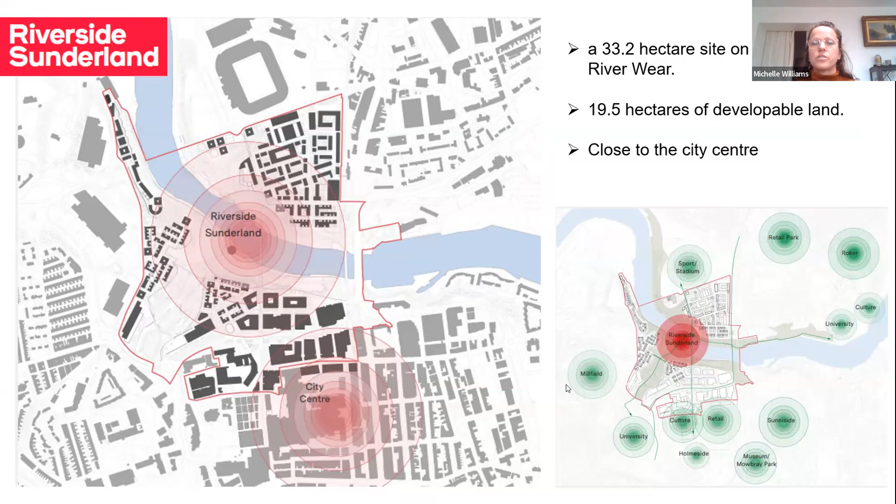Using our footprint methodology, we initially helped the council to focus in on the aspirations for the site and determine the brief. So I'll just go into a bit of what footprint is about.

We established the development methodology called footprint. It helped us set up about 20 years ago what the UN described as the world's first responsible real estate fund. Today we use it across our whole portfolio on behalf of our clients, and we used it here for Riverside Sunderland and on the housing scheme.

These processes are continuously reviewed so that we ensure our clients benefit from our project team's experience. The processes are grouped under 6 dimensions, which are aligned with some of the UN development goals, although the master plan goes on to try and achieve many more, which I'll talk about in a little bit.

So this is our footprint roadmap, and I won't go into too much detail because there's a lot of info, but you can see that we track the evolution of the project through the footprint reviews, which happen at each key gateway. We score the project at each stage against the market standard and then how it is doing against the initial brief.

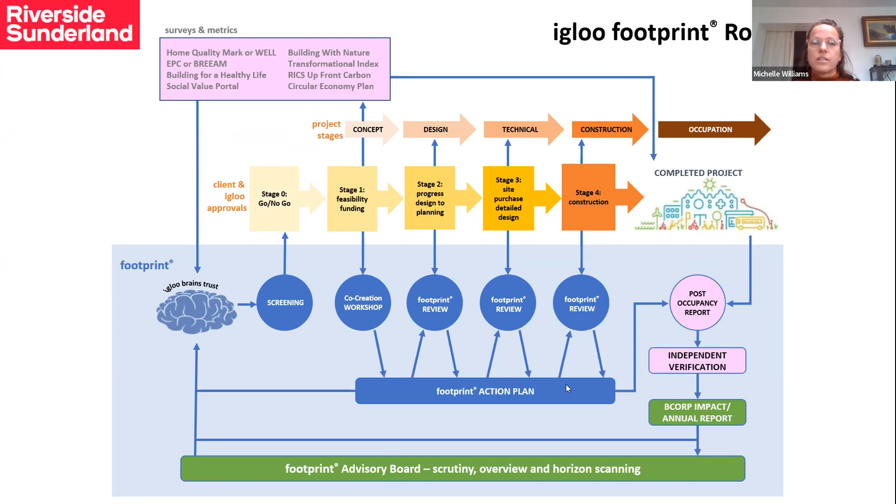The methodology is audited by JLL, and we have a footprint board called FAB, which is made up of industry expert advisors. But now back to Sunderland.

The process starts with a co-creation workshop, where we bring together all the key stakeholders at the beginning of the project to map out what we should be doing to optimize the positive footprint outcome. We then went on to carry out extensive community engagement.

We set up a temporary exhibition in a pop-up shop within the city centre for members of the public to come in, and more than 400 people did come to meet our team and share their ideas.

That was followed by a 4-day workshop with 135 people, who took part in an intensive programme of site visits and discussions. An example of one of the events we held: we worked with a community group and took members of the public to explore Galleys Gill Park, which you'll learn about in a bit, where they engaged in nature spotting and picking blackberries.

All that engagement is then fed into the project action plan, which is essentially the brief, and that records the priorities and actions with a maximum positive impact.

Riverside Sunderland is a beacon of change, leading the way towards a new kind of city living for the future. Harmoniously integrated in this green and waterside landscape, Riverside Sunderland is a magnet for investment, attracting businesses and homemakers seeking to pioneer a planet-conscious and prosperous future and find a sense of belonging in a new, forward-thinking, zero-carbon community.

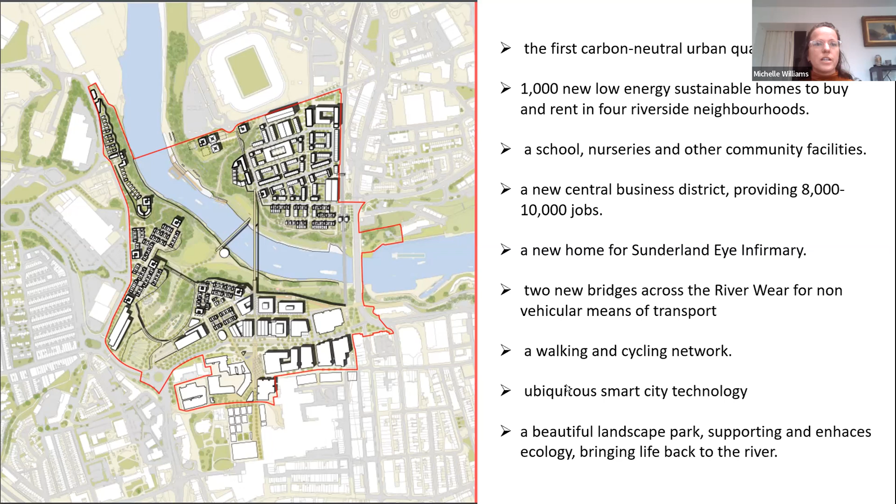At the end of the presentation, we can share website links to our methodology and the master plan details as well, if you want to take a closer look.

I have stopped sharing. Paul, over to you. Right, hopefully I'm sharing - is that sharing screen now? Just my face. Paul, we agreed we weren't going to do this. Please don't start showing mine now. Is that sharing? I think you've got something above what you want to be sharing - your Google Maps tab, I think, on top of the presentation beneath. Is the green plan showing now? Yeah, there is. Yay, perfect.

Apologies, everybody. Hello, I'm Paul Shirley Smith, a director at Camlins. We're landscape architects with a team of 15 to 20 people in Shrewsbury. We work all over the UK, sometimes beyond, and we've been at this for more than 30 years. We're broadly a design-led urban regeneration practice, among other things.

So this is an amazing project for us - it's a huge project. It addresses all the big things that preoccupy most of us these days: climate emergency, biodiversity crisis, levelling up, basically finding new ways of living, and immediate local concerns like creating jobs and building communal life in the city. There's a huge appetite for this in Sunderland to get on with that right now, and that's really what this plan is about.

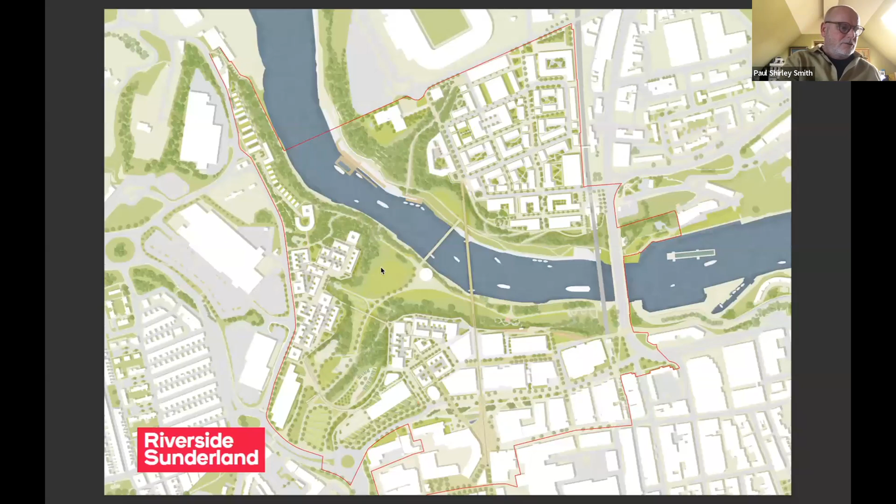I'm going to talk about the master plan, and my colleague Luke Coe is going to talk about Vaux Housing, which is a part of the master plan about to be delivered. There's so much to say and not much time, so I'll go quite quickly, but even then it's still only a snapshot of all the work that's gone on.

So this is an aerial 3D of our big green plan. We can see the North Sea out here, the River Wear and the River Gorge, and the city. This is the Victorian grid, the city centre itself coming across, and then we can see the site with the new neighbourhoods here, here and here, all based around the gorge and this huge amount of greenery.

I'm actually going to, hopefully this will work now - sharing my screen with Google Earth. Much of this work was done during lockdown, and we found it was so hard to understand the 3D that half of our meetings were spent zooming around in Google Earth. So I'm going to do that now because it's the quickest way to explain a whole lot of things.

This is Sunderland - you can see the whole size of it here, and you can see that this site, although it's very green, is actually a city centre site. This is the city centre, and this is the site here, right here. So it's a city centre site - very important to keep that in mind. But it's a city centre site with a difference; it doesn't feel like the city centre. Out of all the places I've worked over the last 30 years or so, this is actually the most dramatic and interesting place in terms of its topography and its history.

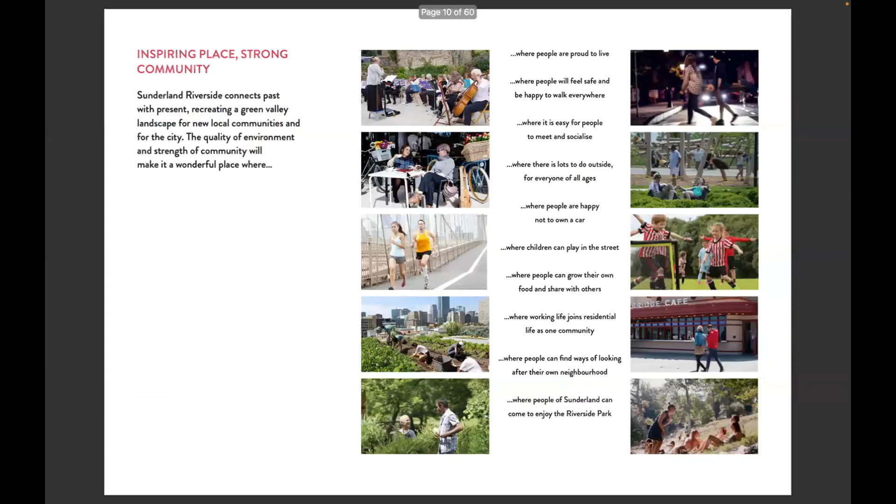So this is all about people and their aspirations. It's not a drawing exercise or interesting geometry exercise, it's about people. Here in Sunderland, it's got to be about history, obviously, but mostly it's about change and about the future, and it's about their relationship with their environment. The master plan basically sets up relationships between people and the natural world in a way which helps things to flourish.

So you've seen the general arrangement of what's here now. This is the existing site, so we can see Vaux here, the brownfield sites that Michelle mentioned, Farringdon Row, and this huge Sheepfolds area with the gorge coming through there.

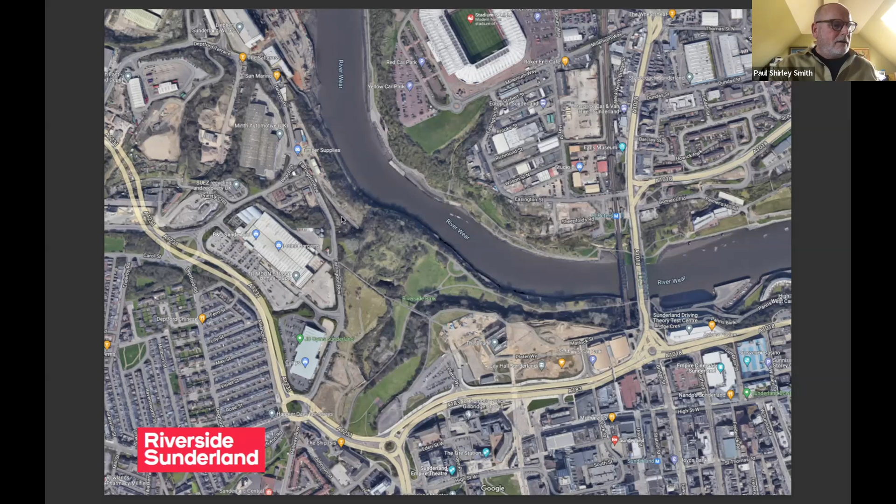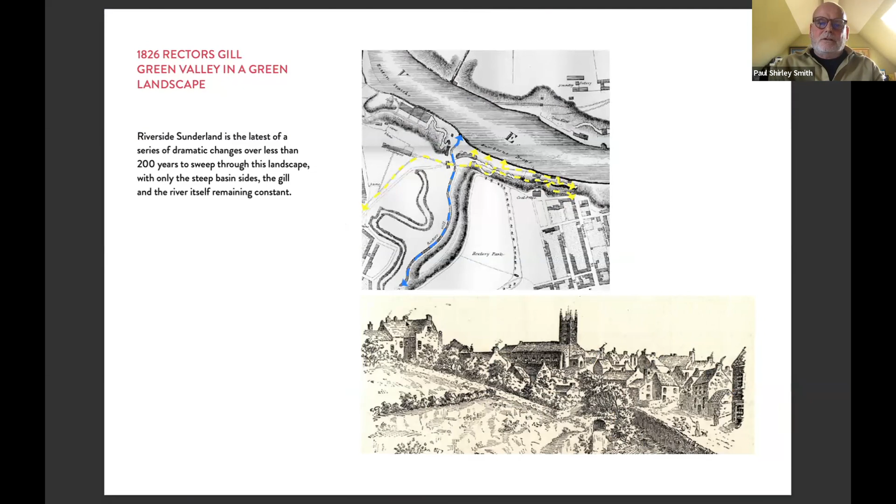So just very briefly at the history, even by 1826 we can see the industrial revolution was already getting going. This was still a completely green little valley coming down to the gorge, but by the 1940s the whole thing was completely subsumed in the industrialization of Wearside. There's shipbuilding on an astonishing scale, of global importance really. But actually this is all about the collieries on this site, and this is where all the coal drops came through from various tunnels and collieries to drop down onto boats.

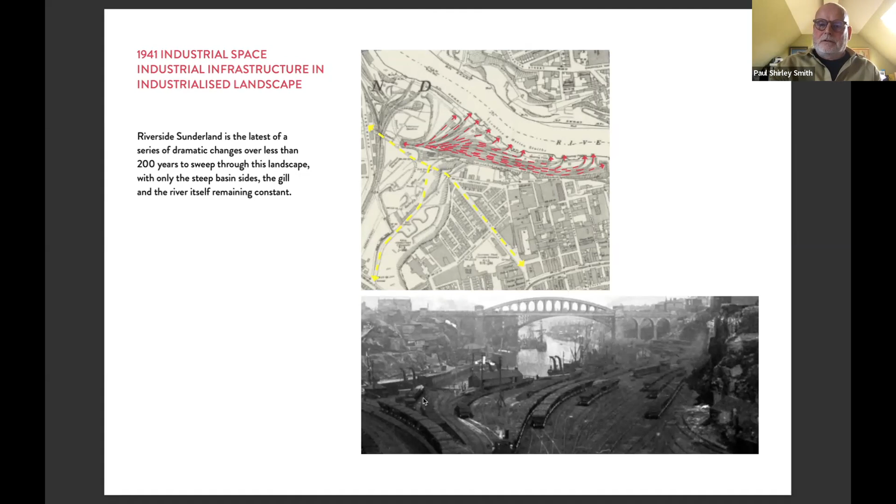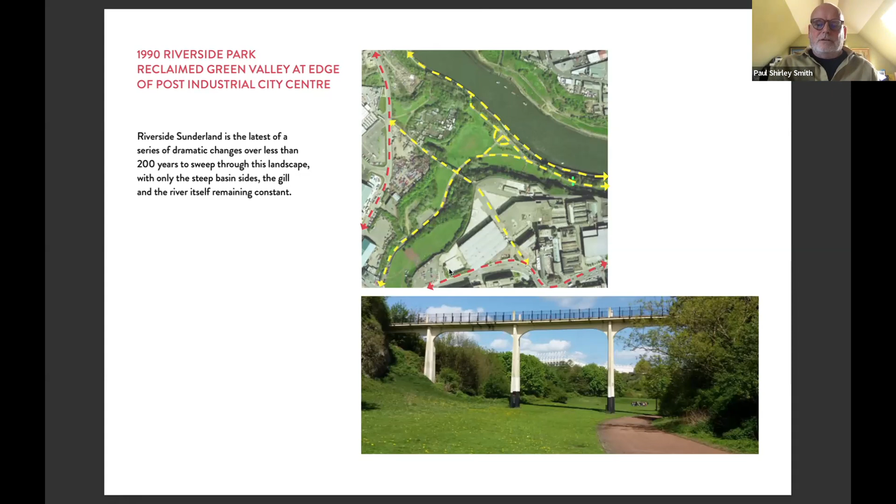So completely industrialized. Then by the time we get through to the 90s, there's a reclamation process which greened and cleaned everything up. There's lots of great work there, very important first steps, but it wasn't part of an overall vision for joining communities together. So the net result is it still feels very, very cut off and remote, and that's how we find it today. So the current plan is to actually make it the centre of a much bigger master plan, and then finally bring it back.

Topography is a huge issue. So we have the city up above, there's a big series of plateaus, and then cutting through that we've got these steep banks—we say banks here, but actually they're literally cliffs—coming down to the park level in the middle, and then a further drop down to the actual River Wear itself.

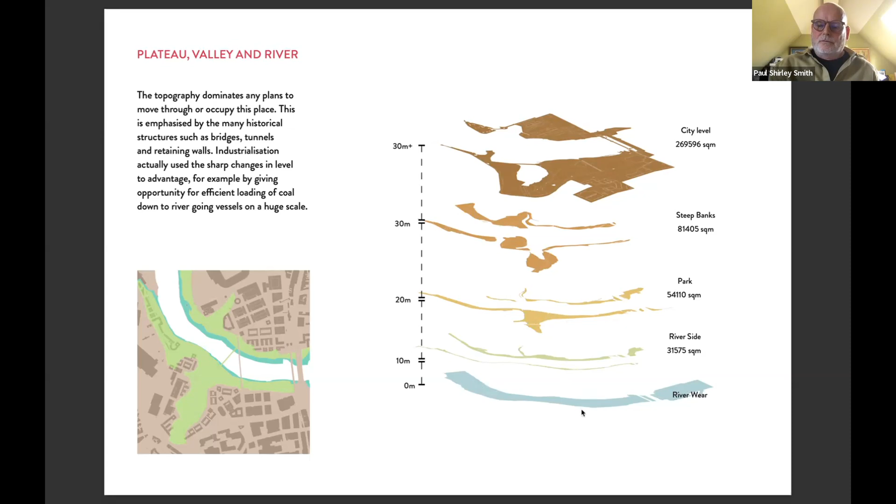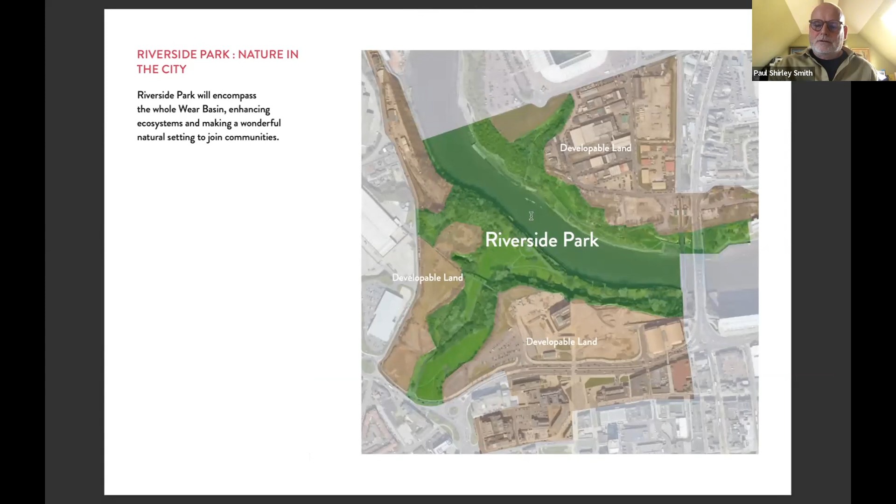So that gives us this pattern of developable land, flat land which is well connected with the city, and then this whole world of greenery in and around the River Gorge, connecting up in various ways. And then this shows how that gives rise to this series of new communities and development land.

We thought it was really important to start by talking about biodiversity, and the heart of the site is already very biodiverse, not least the river itself and its ecology. We worked very closely with ecologists to categorize and quantify all of the existing habitat, a rigorous process which we then took into the proposals—this is the master plan where we've categorized and quantified all of the proposed landscape.

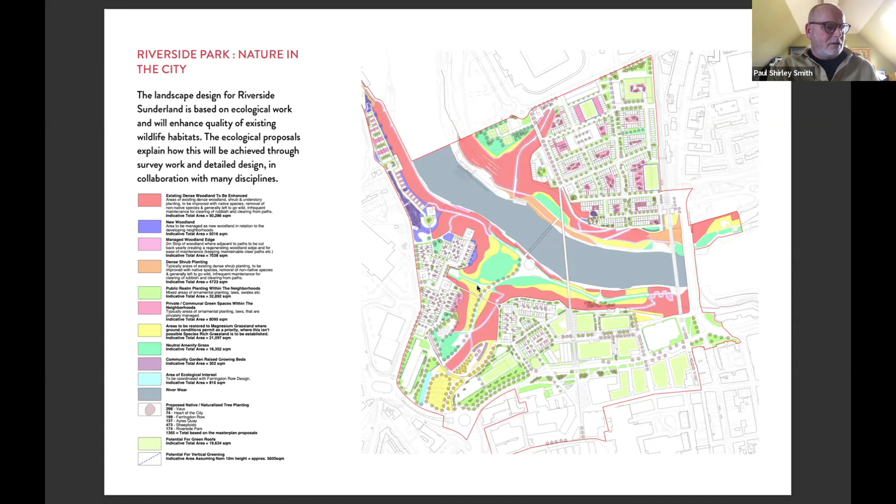So we're thinking of landscape not as landscaping, we're thinking of it as habitat, and what this has given us is a net gain of 11.2% at this level. Obviously that needs to be taken into the detail, but there's a target there for everybody to meet within each different development. It does make sense at a big scale and can be carried through to a small scale.

We've talked about movement and the fact that this existing movement is essentially very weak and poor quality in terms of what the routes are actually like.

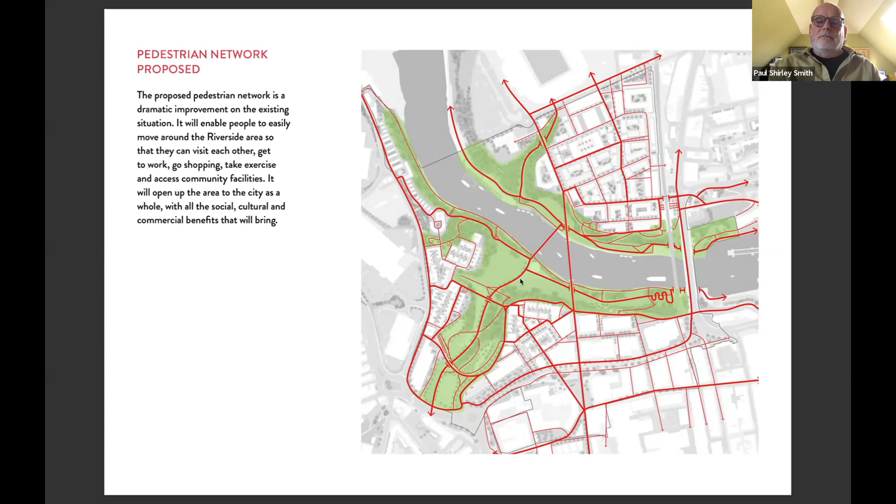The proposed network is much stronger. It's based on a massive increase in connectors, but crucially it's about hierarchy as well. We've determined the accessible routes, which are step-free and properly lit, and concentrated on making all of those work. Then there's a whole finer grain of stepped connectors, which are really important and inevitable and need to be invested in, but secondary to the well-lit, fully connected network.

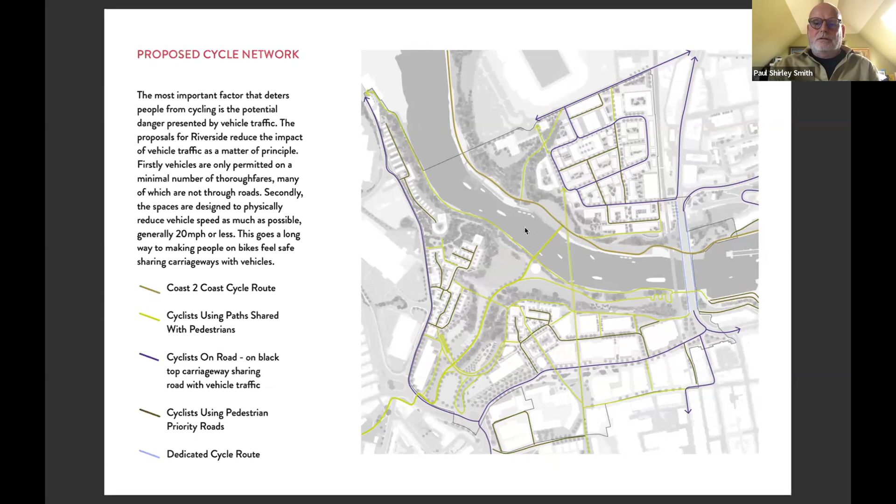The cycle network is based on shared pedestrian space. Imagine this is a fine-grained neighbourhood of green spaces and places where people live, where we wouldn't want segregated superhighways. The only main route, apart from the main roads around, is the coast to coast. But the theme is about how people behave towards each other rather than creating major routes through.

In terms of SUDs, I think like everybody else, we're thinking of this as the sponge city approach. This scheme doesn't have a SUD scheme; it is a SUD scheme. The landscape soaks up water like a sponge and uses it up as much as it attenuates.

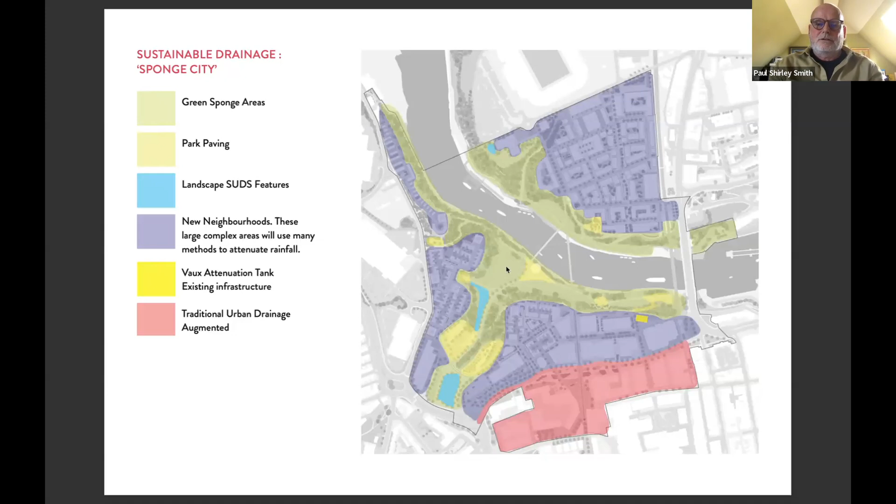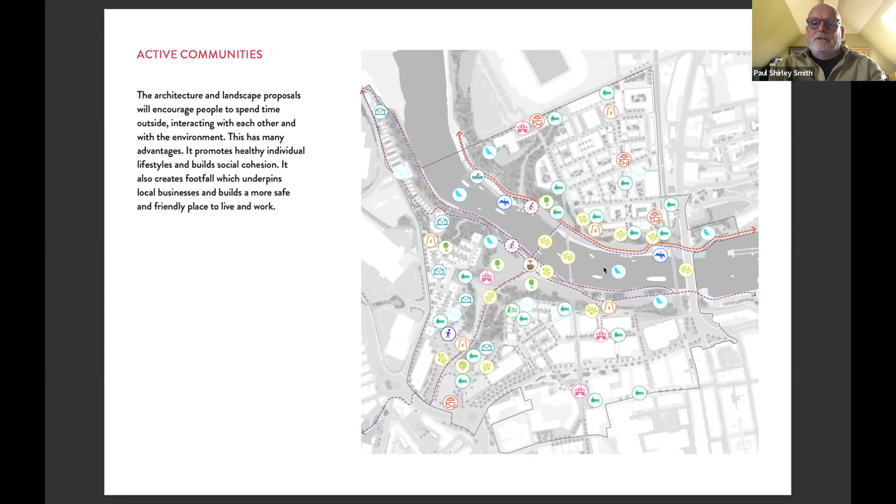Through all of this, we're absolutely intent on the landscape being engaging and adaptable. We're always thinking about what can actually happen here, and that affects not just the landscape design, but how the circulation works, how the road network works, and how all the buildings work, how all the ground floor uses work. All the time, the team's been looking for where are the schools, where's the community centres, where's the surgeries, and so on, and then all the recreational facilities on top of that.

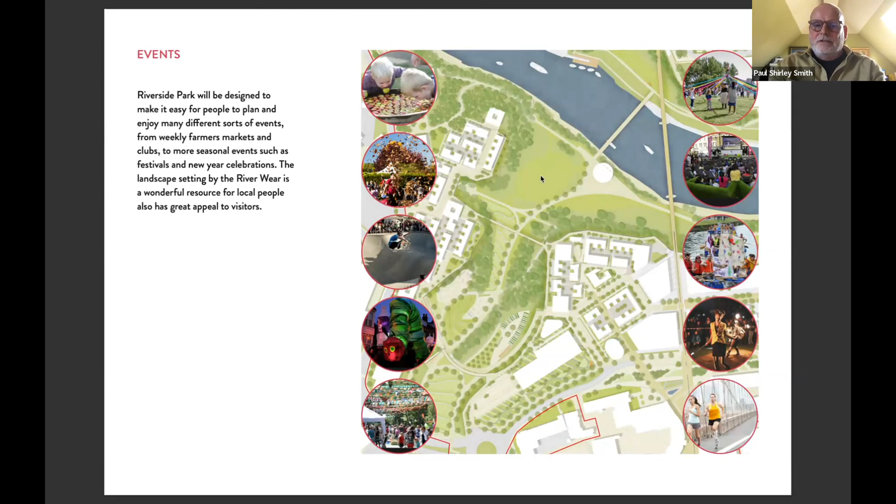The park really is a destination in itself. It's got a lot of multifunctional aspects and lots of facilities, and it works not just on a local scale or a city scale, even a regional scale. It's going to be a very important resource.

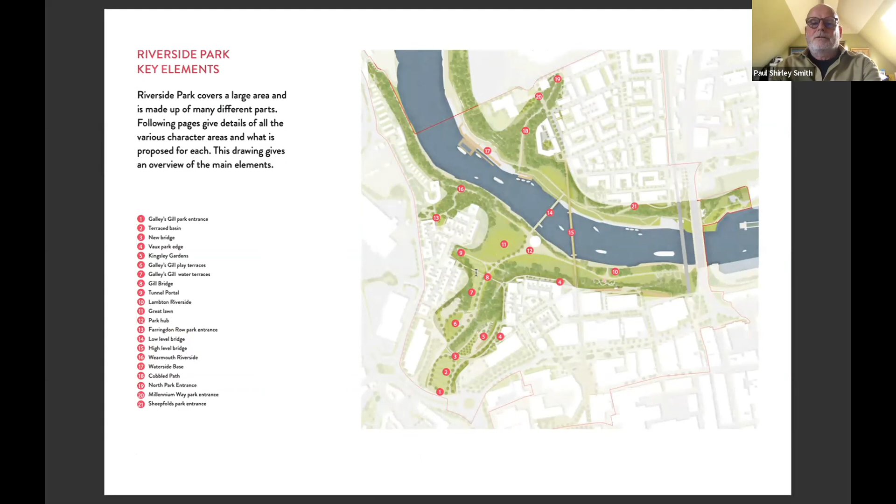We've talked about community well-being, travel, healthy lifestyles, neighbourhoods, and so on. So it's laced through everything we're doing. The park itself is a design set piece, and our friends at One Environments are starting to design parts of it now, particularly some of the SUDS installations.

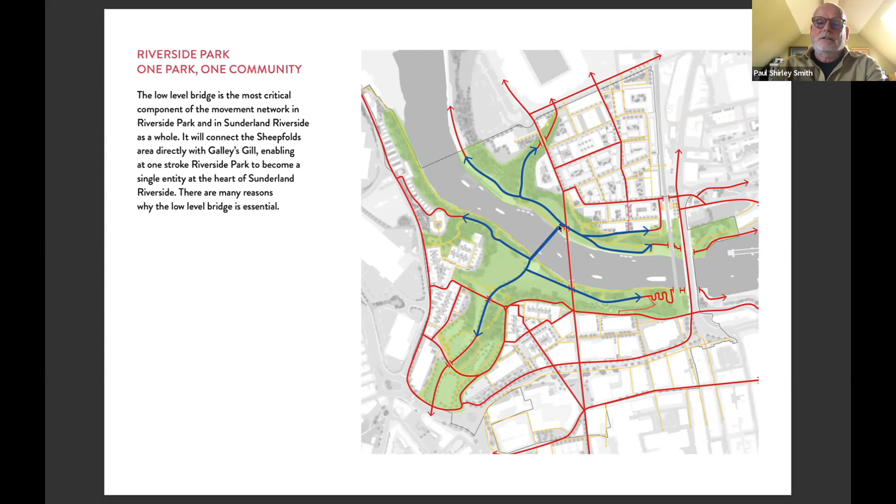I think with the park, the key thing is this, what we call the low-level bridge. It's the key factor in the road and footpath network I talked about. It connects up all of these major routes and pulls the whole thing together down at this park level. There's the higher bridge, the high-level bridge, which sort of literally overlooks it - it just sails over the top through the sky, looking down on all of this. So it's not connected with this network. It's the low-level bridge which is the real key thing at this neighbourhood level.

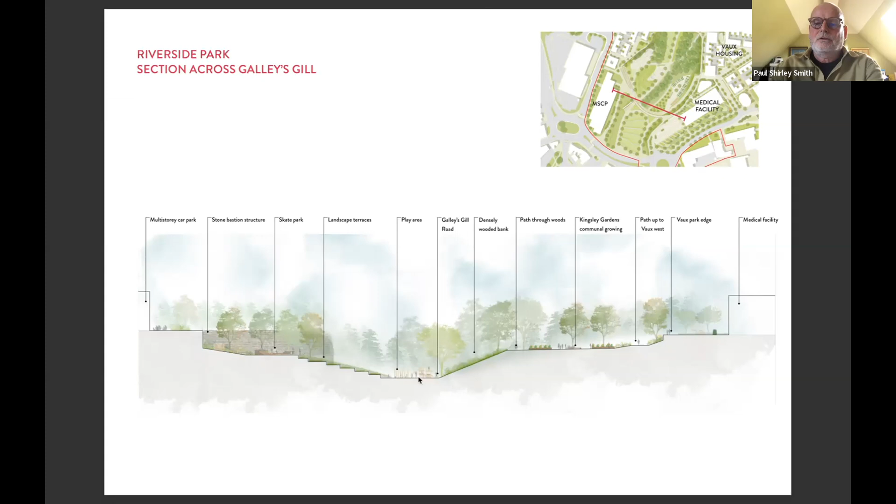This gives you an idea of the scale we're talking about here. So this is just this little bit at the top of Galley's Gill as it starts to slope down from the city. You can already see how separate it is from the city as it slopes down. This is really quite near the top, and here you can see this is the shallowest route down into the area, and that's already nearly 1 in 10 as it slopes down here. So you can see how it's overlooked by all of this new housing up here, which is actually really nice for the housing and really nice for the park - natural surveillance.

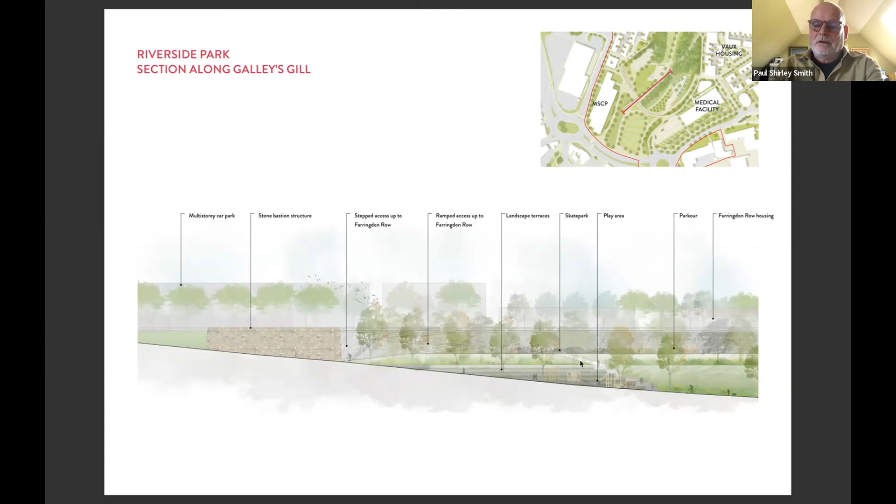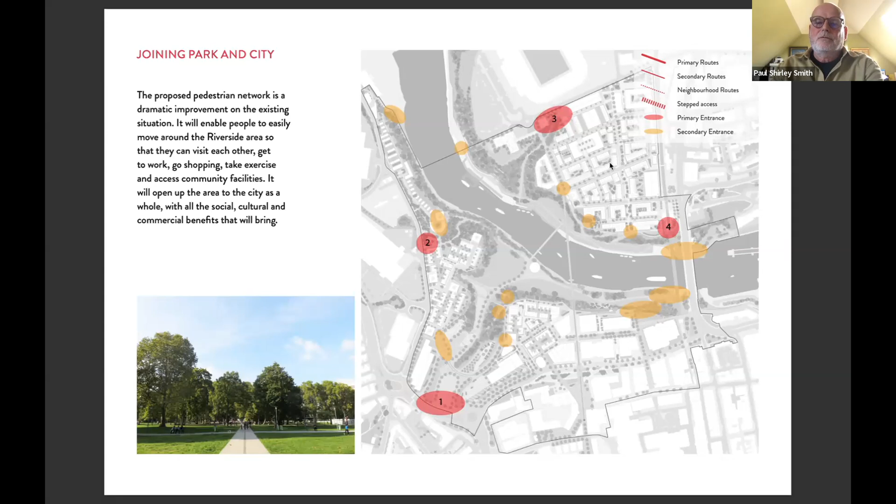The entrances to the park are very important. This is the one I've just mentioned from the south, so there's a real civic presence as Galley's Gill comes up to meet the city here. By the Stadium of Light, we've got a whole new entrance here with a cobbled route coming up, so this needs to have a real civic presence that it doesn't have now. Likewise, there's a metro station here at St Peter's - again, this is an entrance not just into the park, but into the whole of Sheepfolds. And then there's another entrance here at Farringdon Row.

One thing that was impressed upon us very much at the beginning, and became obvious quickly, is that the park at the moment is not a place where most people want to go most of the time, and most people would actually never go there. So that's quite a point to start from.

Lighting is incredibly important in making it not just accessible but inclusive, so that everyone would want to be there. We had to accept that you must light these routes, or else people just will not use it much of the time. And that obviously needs to be balanced with the ecology - really important issues which need to be designed through in the detail.

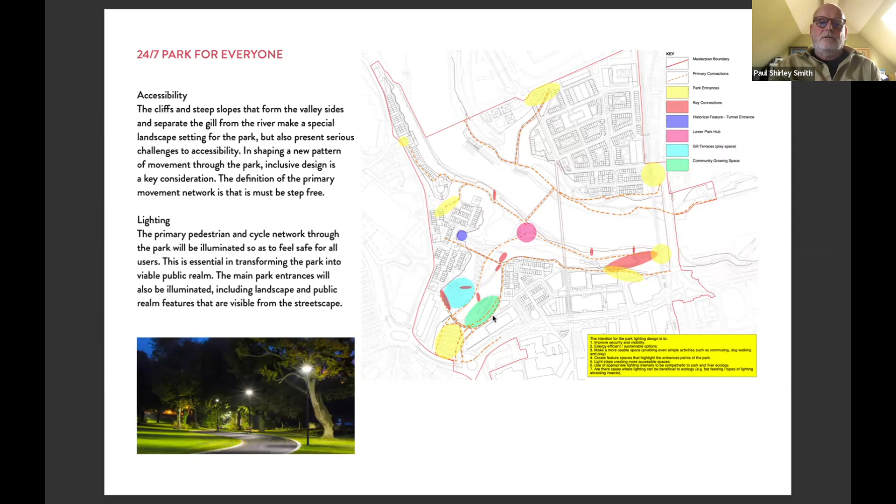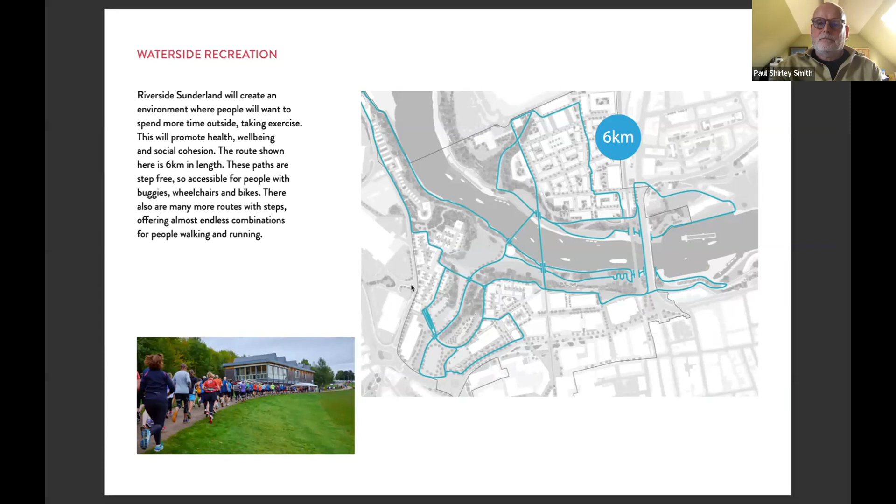We looked at waterside regeneration and recreation. We've got facilities underneath the stadium, but also just how do all these routes go together? This is actually a 6 kilometre running route, or even a pushchair route, or a wheelchair route, step-free route, which we've shown weaving around through the whole area, all focused on the park. This was a very interesting discussion, actually.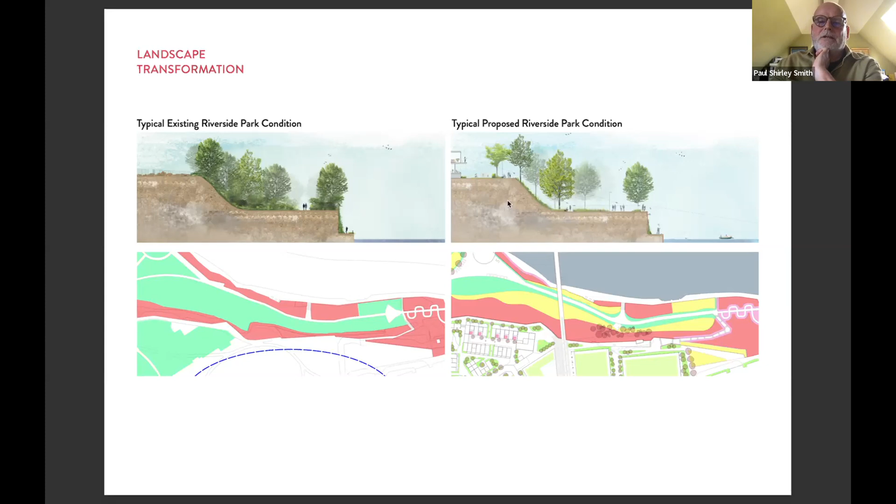And then we've got new uses in the buildings here with visual connectivity right the way back to the edge of the park. But that kind of needs to be balanced with the keep-it-wild approach. As the park is designed in detail, I'd say that was one of the crucial issues people need to think about.

There's this limestone base, so magnesian limestone grassland is going to really help us here, so we can encourage biodiversity much more than is there now, but also keep it as a sort of open landscape - combining biodiversity with visual openness.

With the park and with engaging people, it's really important to find models which do engage people, so that people are using the park, involved in decisions in the park, and even growing food in the park.

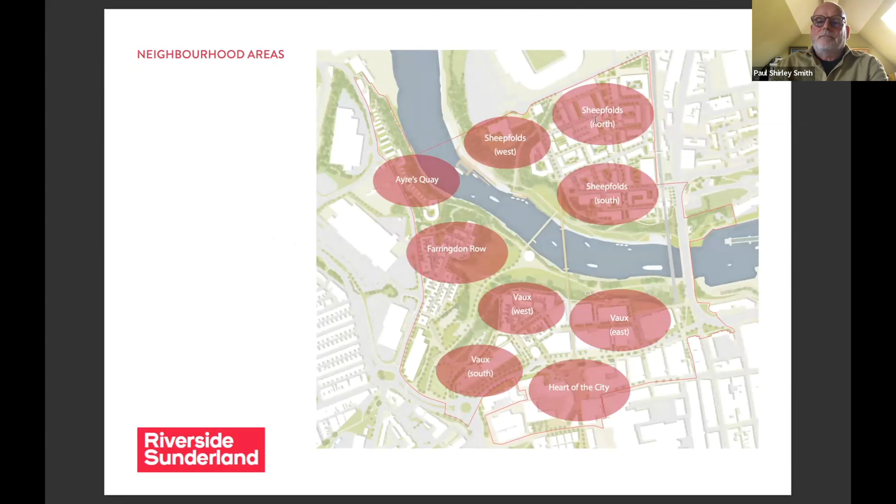And these - I'm going to just talk very briefly about the different neighbourhoods around the park. It's a big plan, but there's a lot in it if we zoom in.

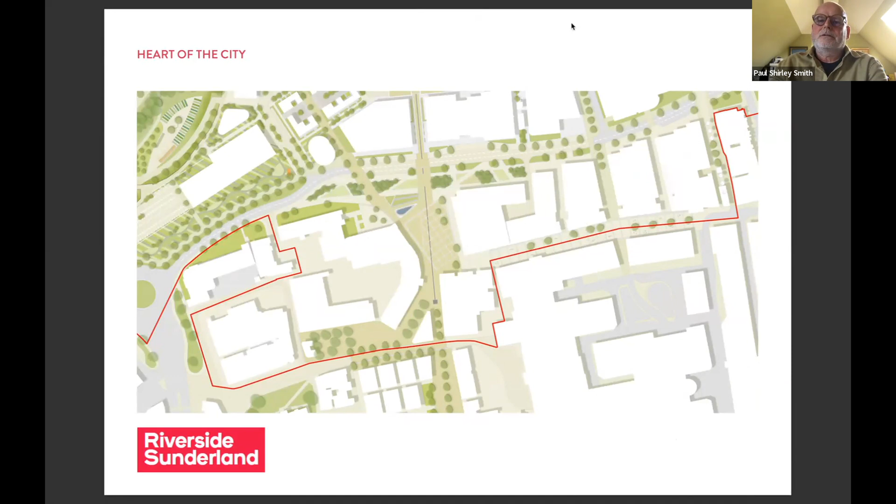So this is the city centre itself around Keel Square, which you might be familiar with, and the Keel Line coming across the bridge - that connects strongly with Vaux. Really, this is about taking the grid of the city across into the east part of Vaux.

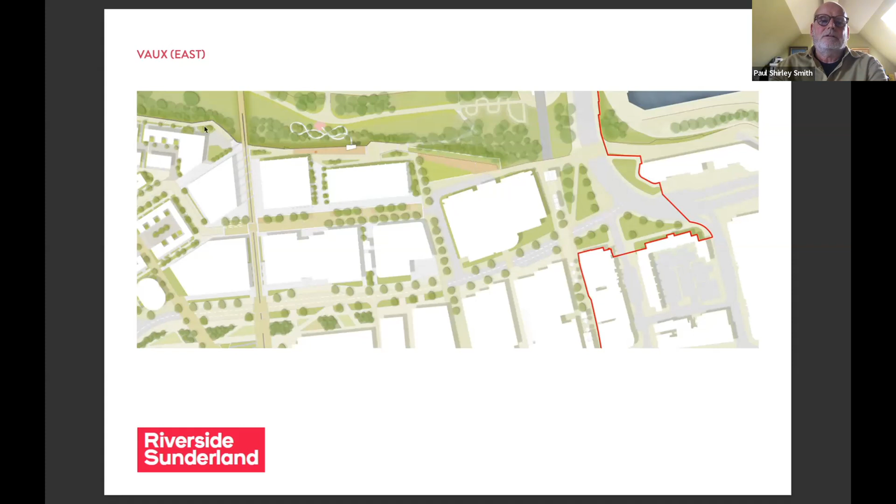Now we can see this is the east part of Vaux, and it's also about setting up this really strong cliff edge route as something - a real kind of civic experience that sticks in the mental map of the city.

And then Vaux itself, Vaux Housing, which Luke will talk about. This is about creating this route around overlooking the park, which is very dramatic, actually - really lovely, but then having a sort of fine-grained neighbourhood for people to live, right next to the new town hall, which is right here, which is interesting.

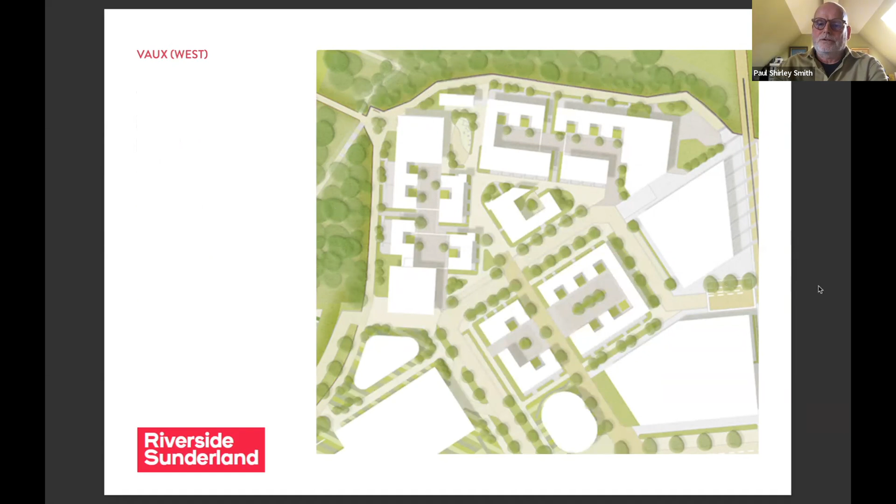And then this is the end of Vaux, where it connects down into the top of Galleys Gill, with a food growing thing at Kinsley Gardens, SUDS facilities, water terraces, and so on.

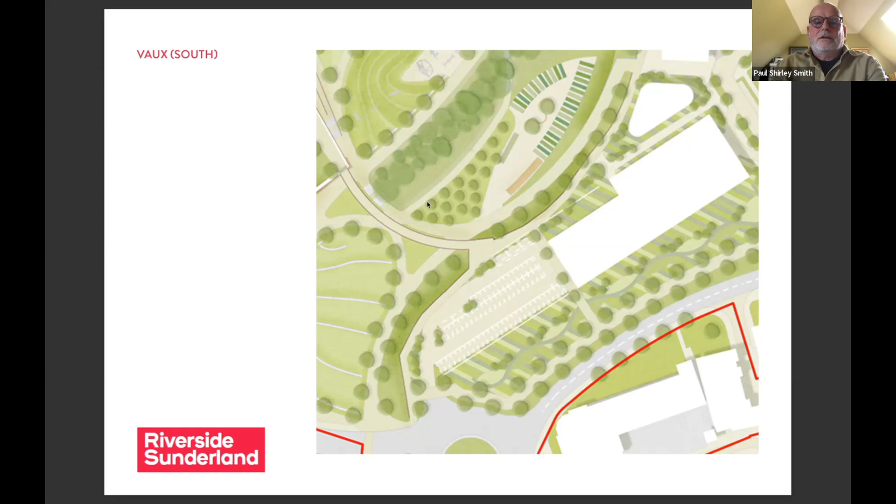And then Farringdon Row is about creating these lovely intimate neighbourhoods, but at the same time really encouraging public movement around the edge of the cliff, which there isn't anymore, and then connecting through. So this is a multi-storey car park, and then this is the more civic uses here with the eye hospital, connecting all those things through to the multi-storey car park in the best way.

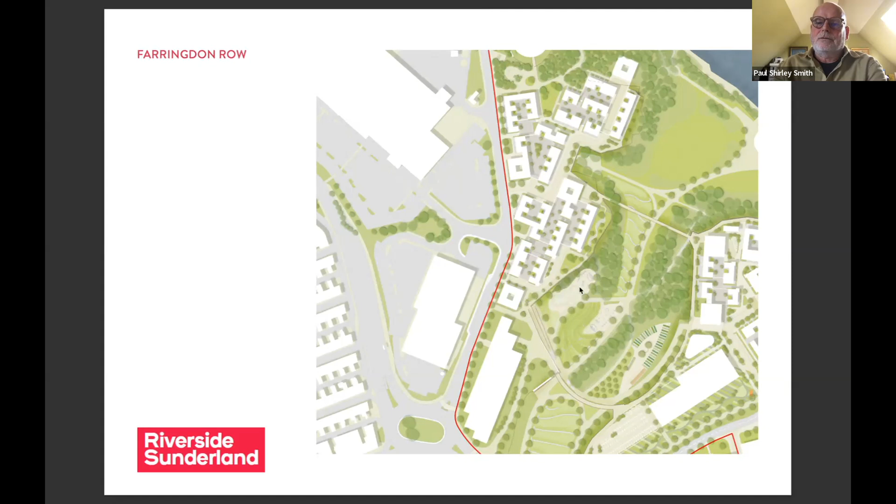And also about how can we get access. Getting access down into the park is very challenging, so we need to look at every way that we can do that.

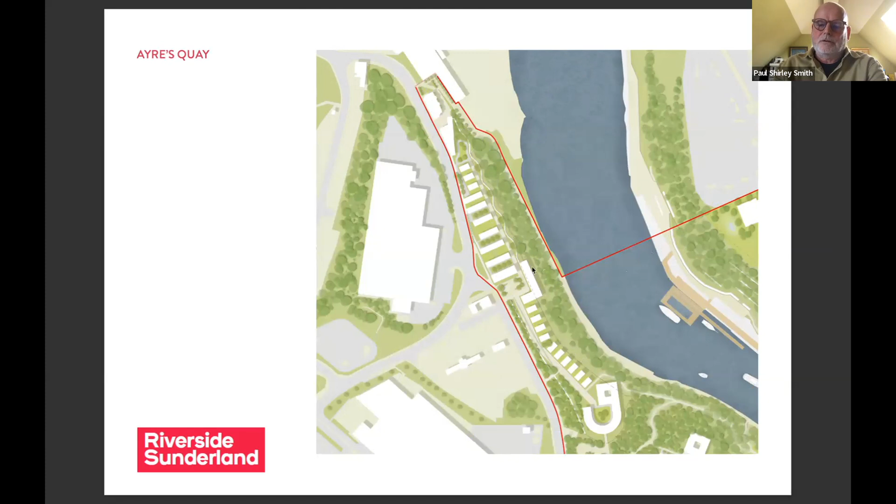And then Ayres Quay is about this amazing heavily treed embankment down to the river, this heavily treed gorge looking back across to the stadium, and then connecting with the city with little squares, encouraging use of this linear movement along the river and down to the river.

And then Sheepfolds is this very substantial area in the north, which is essentially a flat grid of industrial buildings. But it's reworked - the hierarchy of the streetscape is reworked to make a route accessible to vehicles, and then the rest of it, design out traffic altogether if we can. So we've got this amazing linear route connecting up from the promontory overlooking the park and the river all the way back up through. So the whole series of green spaces and community uses - schools, clinics, and so on - are clustered along this route.

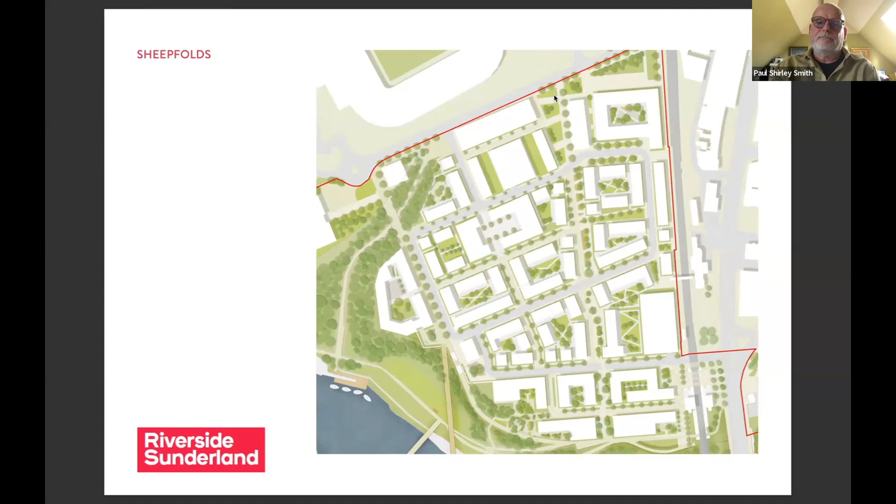So my colleague Luke now is going to do a catch up on the status of development and talk you through Vaux.

So that's okay, thanks Paul. Yeah, are you okay stopping and starting sharing between you? Are you going to share, Luke? Yeah, Paul, could you stop sharing your screen and I'll share mine?

Okay, hi everyone, my name's Luke. I'm a senior landscape architect for Camlins, and I was just going to take over from Paul and briefly show you what the current status of development is over the Riverside Sunderland master plan, and also briefly how Vaux housing has actually developed slightly. So hopefully everyone can see this first page, but this is showing how the master plan has actually moved on and where we're at now. So first, what's really great to see is that there's actually quite a lot going on, and that the master plan vision is being maintained and progressing.

So key, I would say, at the moment, is the high level bridge. That's, I believe, out to tender, and this is going into further design development. That's actually happening here, crossing over. The commercial units that face over the River Wear, they're actually on site right now - the little image is just a picture showing some cranes actually up, and it's actually started to be built. The City Hall, that was completed at the start of the year.

As you move into the heart of the city, there's a new hotel that sits here - again, I believe that's actually basically completed now. The medical facility, or the eye infirmary, that sits on the south side of Vaux - that is, I believe, in contract, so it has planning.

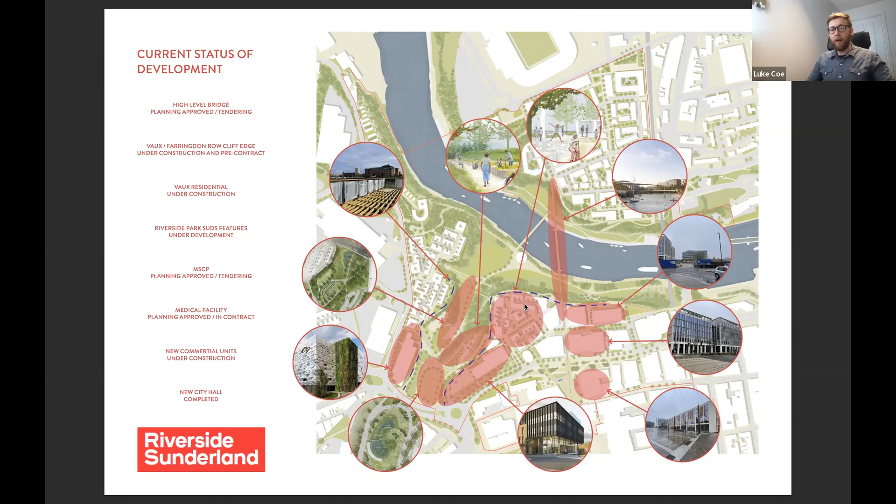And the last bit is actually what we're doing right now at Vaux Housing. So that's what I'll show you next.

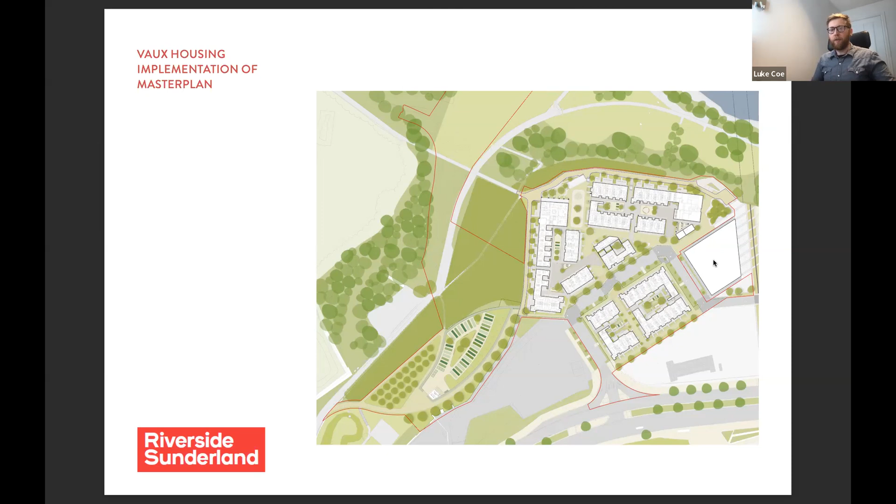So what was really great, I think, about the master plan moving forward into more design development is in part due to the team - the consistency that we've had there. So a lot of the design team was carried over from the master plan over to Vaux, which means there's a real understanding of the site, the constraints, the community, and the design principles. So there's less trying to interpret the master plan - we all had a really strong understanding of it and where we all wanted it to go.

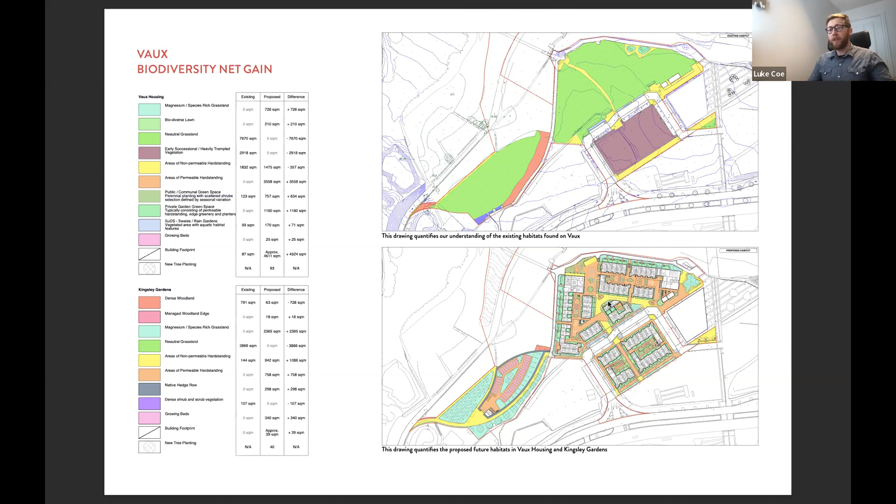As the master plan, one of our key considerations was continuing to push habitat creation and biodiversity net gain. The actual site at planning is at 11% biodiversity net gain, and I believe it would be slightly better now. There was a slight constraint in that the existing Vaux site, when we took it over, had been temporarily seeded with grass, so it already had some value in terms of biodiversity. But we've managed to make improvements by using a diverse mix of planting, maximizing planting where we can in the small spaces.

The planting palette consists of species rich grassland, consistent with species typically found on the site. Particularly Kingsley Gardens is an area of magnesium limestone grassland, which is something we'd look to try and recreate if we can.

The species rich grassland actually does move into Vaux, and there's a big spread and mix of other planting styles which helps with habitat creation, different types of habitat, and improving biodiversity. That's also underpinned with a strong mix of native tree planting that we worked quite closely with the ecologist to set out and put in the right tree in appropriate places.

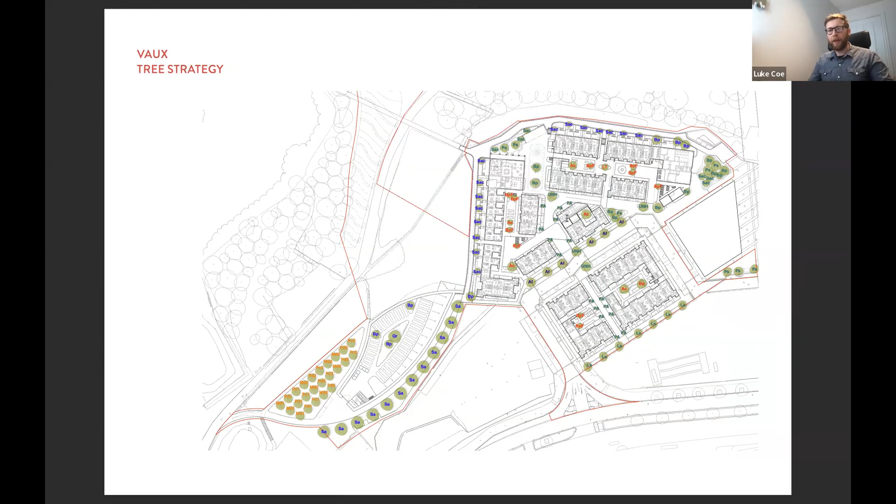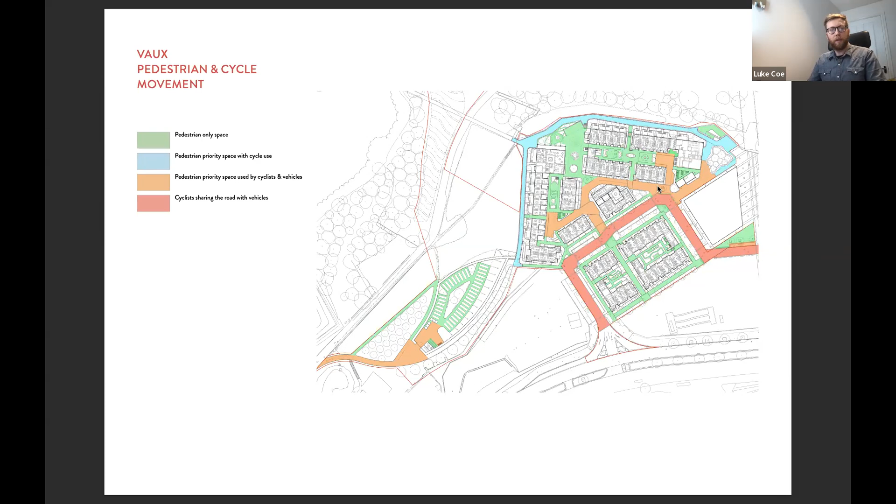That's happening over here. The red route is really the primary vehicle space through the site, just connecting up the small clusters, which is what this diagram is showing. So when you take away all the other colours, you can see how much of it really is pedestrianised, which is great.

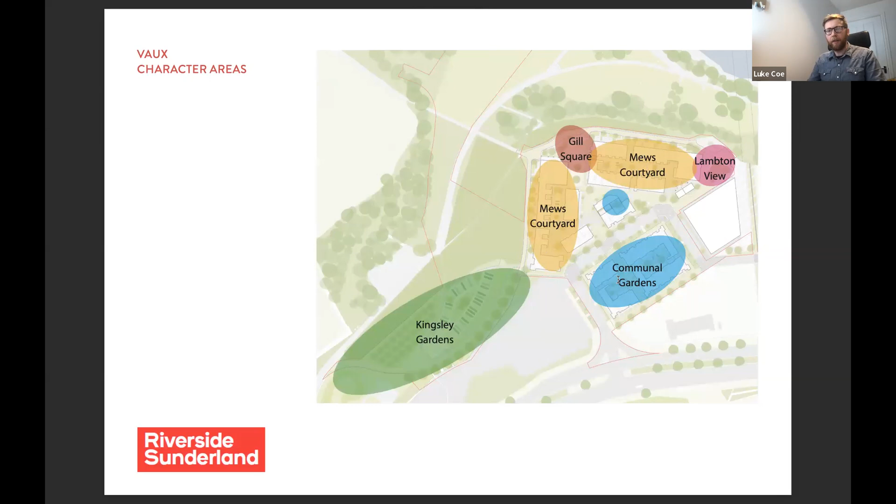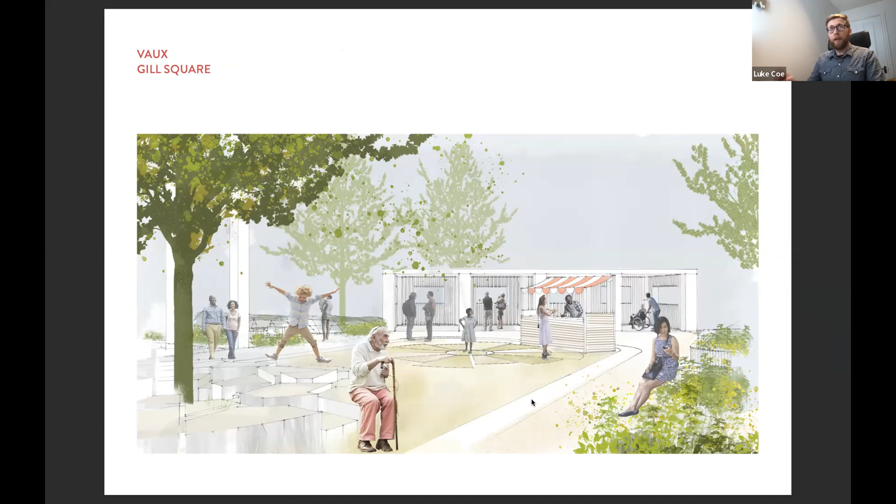Just a final piece on Vaux, I wanted to show you, in the same way we broke down the master plan, how we could break down Vaux, and it has these key areas. We've got Gill Square, which sits at the heart of the plan, really. It's the communal hub. It connects to the Gill Bridge, a strategic movement route that leads back into the city centre, and if you remember from the slides Paul was showing, back down to Gill Square.

Lambton View sits right on the edge of Vaux on the northeast. It's closely related to the new high level bridge and to the beam, one of the existing buildings on site. It's essentially intended to be quite a sociable space, quite relaxed, a space to take in the views, and it becomes quite playable with this big wiggly planted seat that we designed.

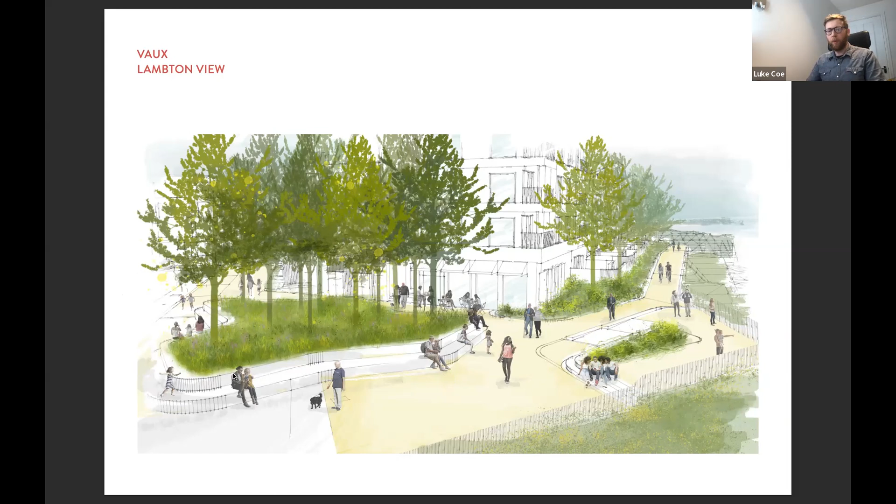The Mews courtyards are residentially focused. It's a strange mix, but one that we like, a mix between private and open space. The latest developments of this are actually quite a bit more green than shown in the diagram here, but essentially it's the same premise.

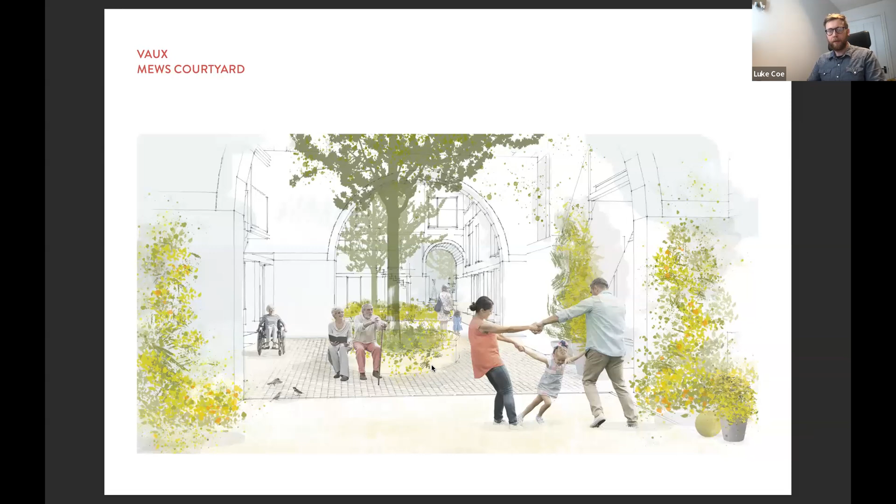And the communal gardens sit in some of the lower blocks on Vaux, but they've always been intended, and still are, to be quite green and relaxing spaces for people to meet and come together.

And then finally is Kingsley Gardens, developing what's already quite a green space on site, but giving it a community feel. The intention is for it to be quite biodiverse, using a lot of species rich grassland in the surrounding green spaces, but it's fundamentally a community space for the people of Vaux to come together and grow and produce food.

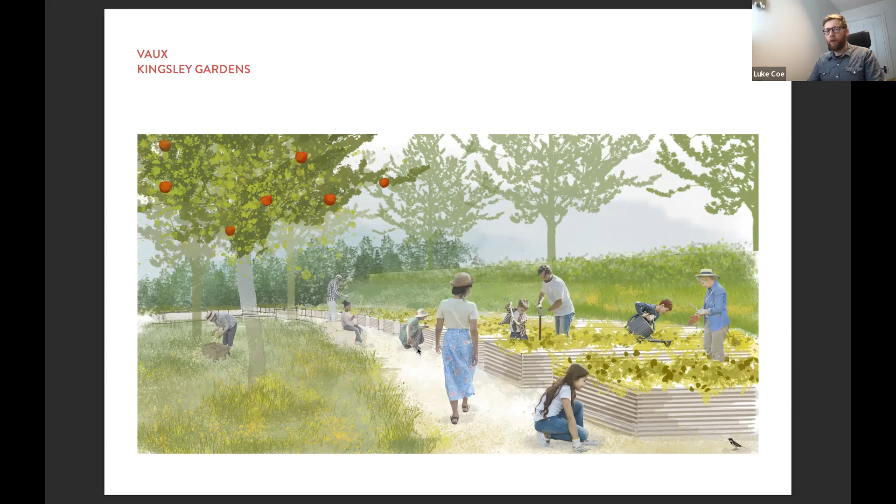One thing that was great about Vaux, and what naturally developed out of the design, was the ability for us to apply for the Building with Nature accreditation. We had to achieve and meet the standards in four key areas, but that quite naturally evolved out of our general principles for the site: creating accessible space, improving habitats, maximising green space, considering alternative methods of movement, and how we're managing water and dealing with that on site.

I'll just pass you over to Michelle for this last piece, which is about the expo.

Oh, hello, sorry, hang on a moment.

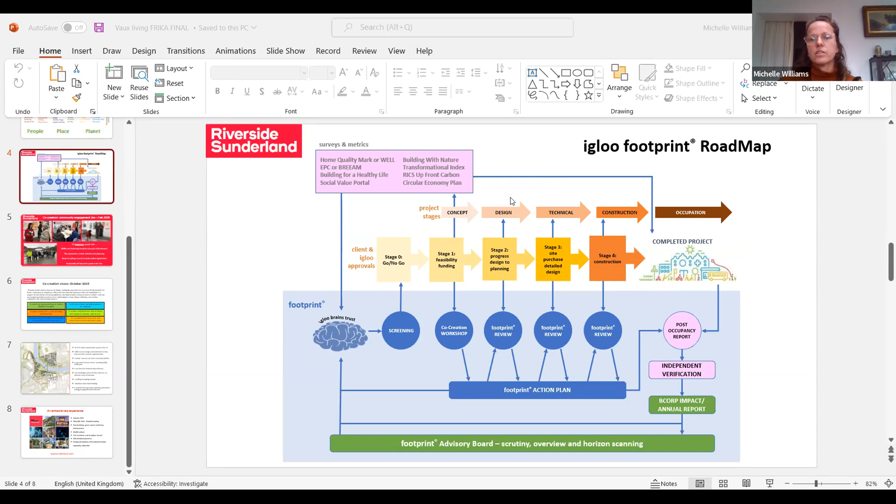So it's not just something that we set out from the start - we really interrogate how we're going. And it holds designers, it holds us all to account to make sure that we're keeping the brief and the ambition of the projects at the heart of the decisions that we make.

It's evidence, I guess, as to why you have the accolade that you do from B Corp - that third party verification is so important. But it's quite a process from that one slide, I would imagine, to get through all of that.

Yeah, it is a lot of work, but it stands in good stead because our projects are exemplar, and Vaux in particular is really fantastic. It's already winning fantastic awards, and that is not why we do it, but it's a nice nod that you're doing well. So yeah, you're on the right track.

Exactly. I just wondered, Paul, also - we're hearing more and more landscape practices looking at B Corp. I wondered whether that's something from working with Igloo or elsewhere, whether you were considering it for your own practice for Camlins.

Sorry, I put you on the spot. Oh, you're muted.

Probably just as well, yeah. It's talked about a lot, but I know it's quite a process to get through. To be honest, we've had our noses to the grindstone, and we're just coming up now to start going through all this stuff. So you look at a project like that and think you have to have most of the ingredients ready for it.